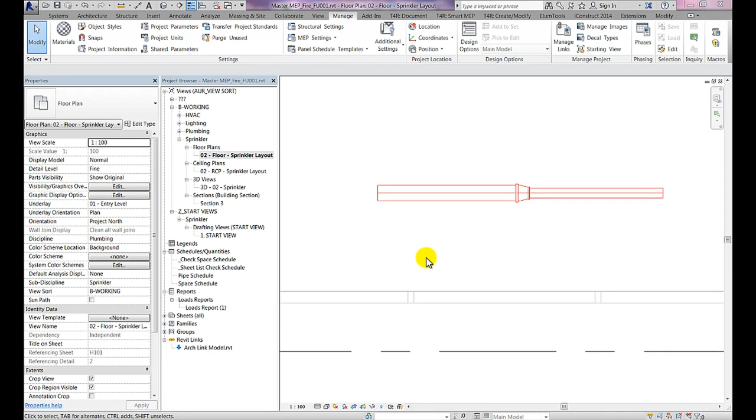Sprinkler pipe routing preferences. Let's now have a go at setting up an appropriate sprinkler pipe type from scratch, and we'll see how we can set up the desired routing preferences to suit.

Go to the Systems tab and click on Pipe. Then from the type selector, choose Standard and click on Edit Type. In the Type Properties dialog, click on Duplicate and call this new type Fire Protection Carbon Steel Threaded. And click OK.

We now need to specify the routing preferences, so click on the Edit button and in the Routing Preference dialog set the following. For the pipe segment, choose Steel Carbon EN10255 Medium. Then we need to work our way down the rest of these fittings and specify the threaded fitting for each.

So for elbow, we'll pick the draft pipe elbow threaded. The preferred junction type will be T, and the junction fitting will be threaded. The cross will be cross threaded. The transition fitting will be transition threaded. The union fitting will be union threaded, and we'll leave the flange and cap as none.

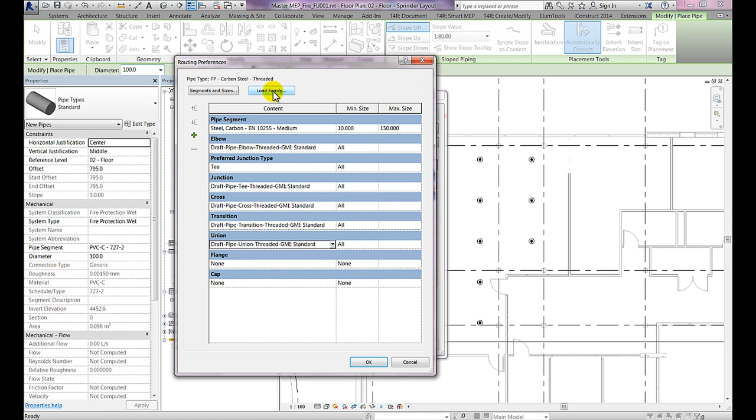Note here also that if fittings are required that are not yet loaded into the project, they can be loaded from here by clicking on the Load Family button. There are also options here to specify the minimum and maximum sizes used for each particular fitting, and additional fittings can be added.

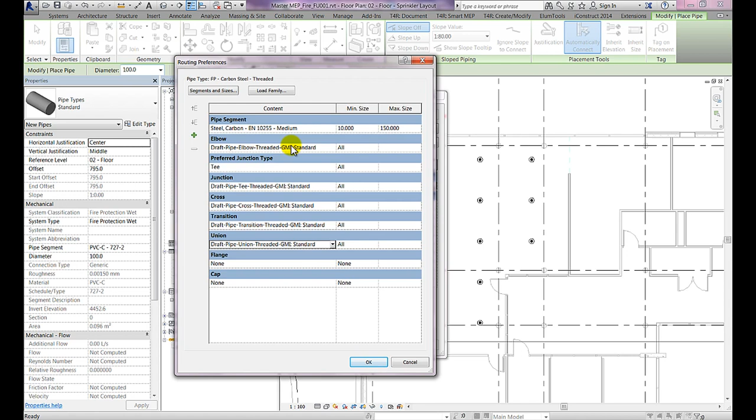For example, it is possible to have one type of elbow fitting for the smaller range of pipe diameters, say 8 to 40, then another type for larger range, say 50 to 150. But for this exercise, we'll leave this as one fitting for each and click OK. Click OK again to return to the project.

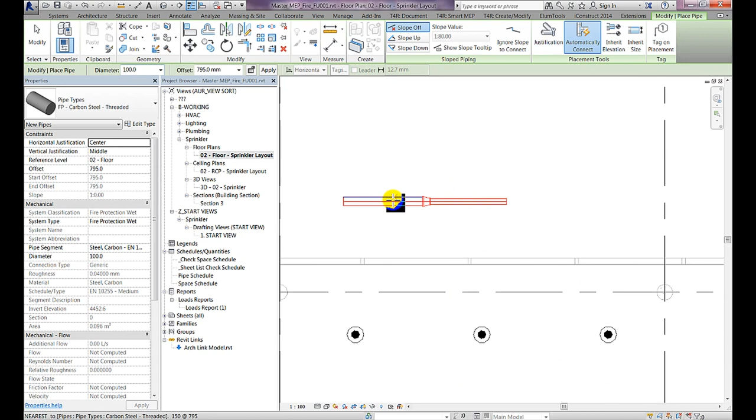We now want to test out this newly created pipe type to ensure that the routing is behaving as expected. Zoom in to where we drew the small section of pipe earlier. Click on System Pipe, and from the type selector, choose the pipe type that we created, Fire Protection Carbon Steel Threaded.

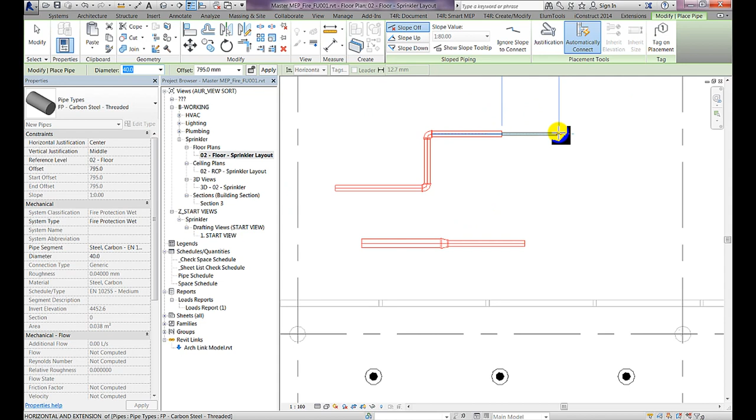Draw a few runs and turn 90 degrees and test out the elbows. Also reduce the diameter to see that the transitions are working as expected. And draw another elbow. Press Escape twice.

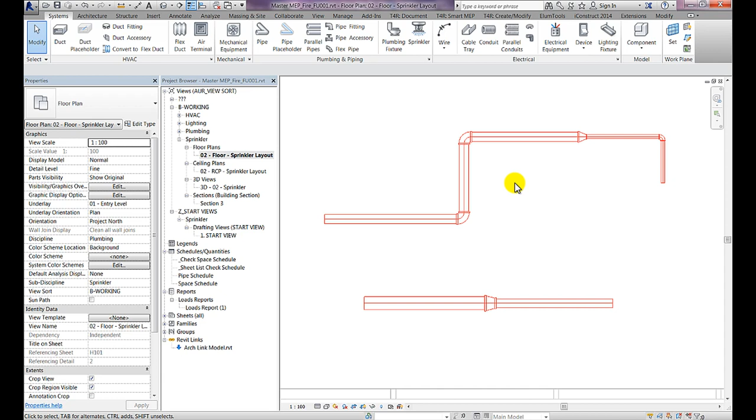We can see here that these routing preferences are working correctly and that Revit is placing the fittings as we would expect. So this pipe type is working quite well and is ready to be used as a pipe type in a project. In the next step, we are going to try the automatic pipe generator tool to connect our new fire protection pipe into the sprinklers that have already been placed in this model.